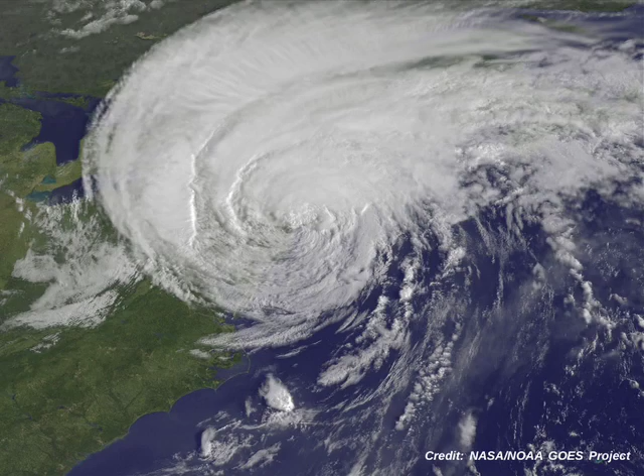Topic is preparing for the storm, lessons learned from Tropical Storm Irene on planning for resiliency and local infrastructure. There's that word resiliency that Tony Flint told us actually does resonate with the public, so we hope it resonates with you as well. I'm Heidi Ricci with Mass Audubon, Shaping the Future of Your Community program that provides support, technical assistance, and workshops to local citizens, trying to encourage them to work with all of you in local planning and land use regulation. And we have three speakers today.

Carrie Banks from the Division of Ecological Restoration, Bob Dean, who's with the Franklin County Regional Council of Governments, and also Selectman in the town of Buckland, which was heavily impacted by Irene, and Patrick Garner of Patrick Garner Associates, and he's also president of the Massachusetts Association of Conservation Commissions.

I'm Carrie Banks. I work with the Division of Ecological Restoration in the Department of Fish and Game. And I grew up along a river, and I've gotten to know it very intimately. And some of the slides that I have in here are of that river and of the area that I grew up in. And I wanted to talk today about some of the river's responses that we saw to Tropical Storm Irene. And probably many of you saw this image on the news, I think about a week before Irene hit. We knew it was tracking up the East Coast.

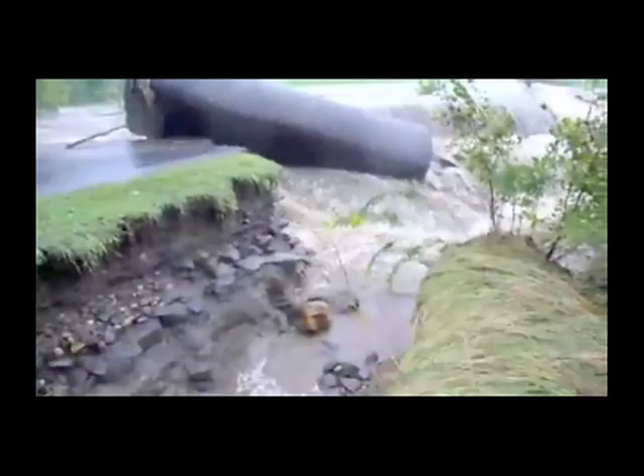As Bob had mentioned, you can probably see numerous videos online of all the flooding that was occurring. I particularly like this one because it speaks to a couple points that I want to make today. The rivers carry more than water. And unfortunately, sometimes that means it carries away our infrastructure, and will have consequences both at a public safety level, but also at a habitat level.

So, as I mentioned, I grew up along the river. My parents still live along the Deerfield River in Charlemont, Mass. And during the day Tropical Storm Irene was hitting here in the northeast, I was paying very close attention to the flow gauges on the Deerfield River. There's one located at the Fife Brook Dam in Florida, Mass. And then there's one about 12 miles downstream of there, located just downstream of the town of Charlemont. And my parents' property is right in the middle, between those two gauges.

But when I saw this number, I was a bit curious. You can see that it was about 53,900 CFS, a little less than the 1938 flood, which was the peak recorded flow there. Upstream at the dam, their emergency action plan that they submitted to FERC, where they were actually getting prepared for the potential for the dam to fail, they reported that their flow was 58,329 CFS, about 4,000, 5,000 CFS difference.

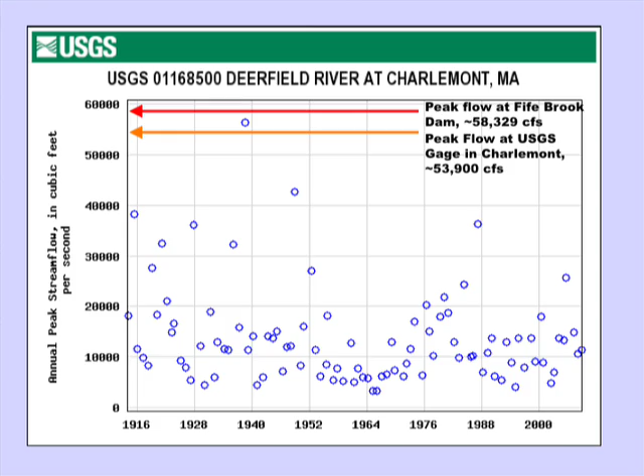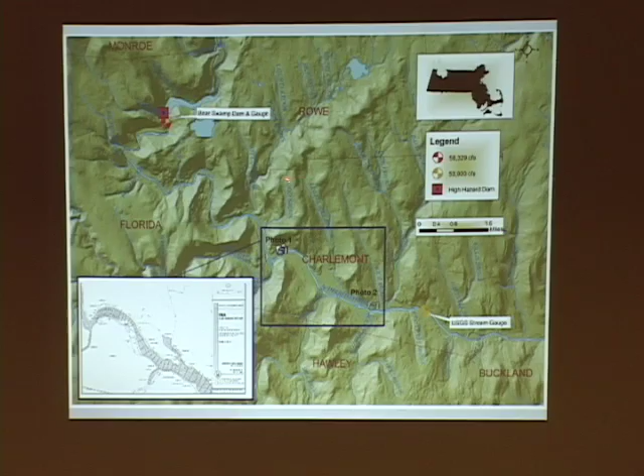What's interesting about that, as I mentioned, the dam is up here on the upstream end. You follow the Deerfield River down, you can see a lot of these tributaries coming in. Pelham Brook, the Cold River, where a lot of the damage along Route 2 occurred, and you come all the way downstream to the USGS gauge. So you can imagine that those ungauged tributaries are contributing a lot of water as well. So I sat there and I thought, where did all the water go? I mean, I know USGS probably has a little bit of fudge factor in their numbers, but considering all the flow coming from these tributaries, there must have been something going on.

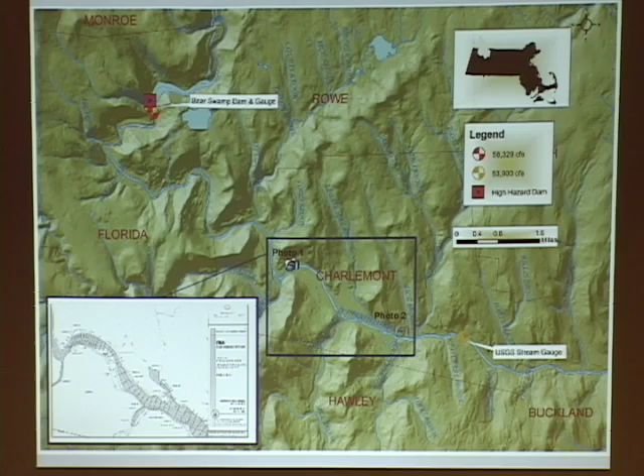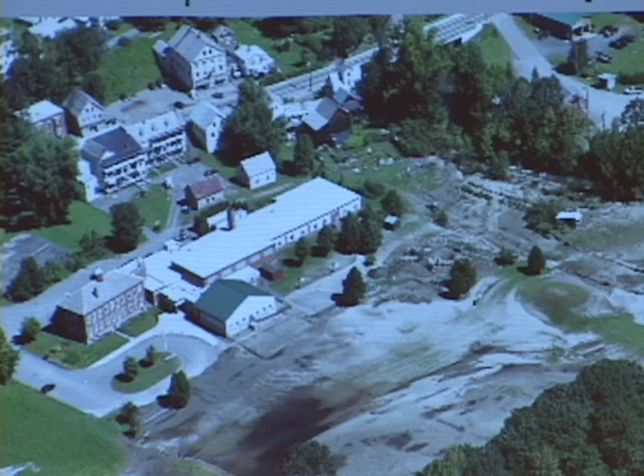Just downstream, this is overlooking the town. That's the Charlemont Elementary School. Back here in the background, you can see this is the wastewater treatment plant, the highway department, and emergency services, fire department. And you can see this whole area was inundated. You can see the deposition that occurred from the flood.

And I think that one of the points I took away from this is that floodplains are important, and as much as we can, we should be protecting them from development. And we should be trying to maintain that access to the floodplain. Pat had mentioned that in a lot of, especially urbanized areas, we see what we call degradation of our streams. So basically the stream is down-cutting the channel, and there's peak flows that you're getting from the runoff.

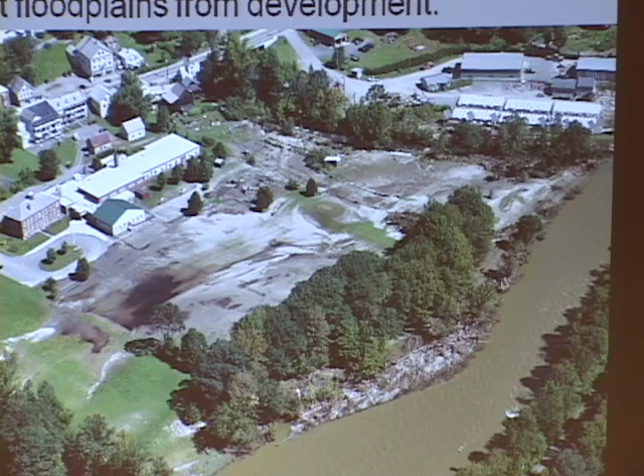And in some of these old farm areas, you often also find old berms that have been built up along the river, trying to prevent some of the higher flows from flooding out the crops. And these go way back. These go back to the '27 flood, '38. You'll often see them right along the river corridor, and that can also be another way of cutting off access to the floodplains.

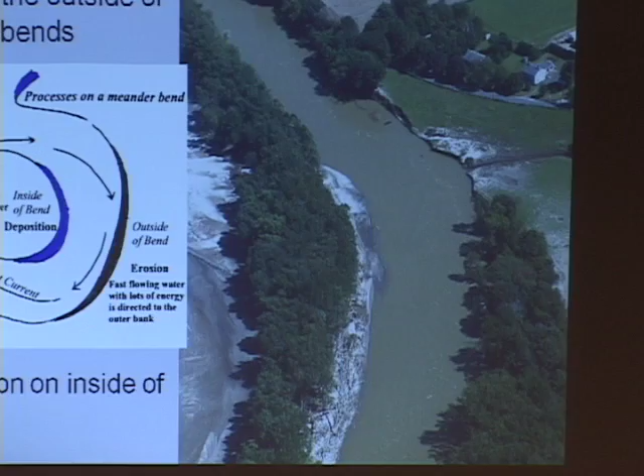Another thing to keep in mind, as I mentioned, rivers not only move water, but they're moving sediments, they're moving other debris that's in the stream. And it's a way for the river to lose its energy. Water has a lot of power. So if you think about it, as you're coming around the curve here, a lot of that energy is focused on the outside bend. So that's where we often see the erosion occurring. But it's losing energy. It's got roughness along this inside bend. And that's where we're often seeing the deposition occurring.

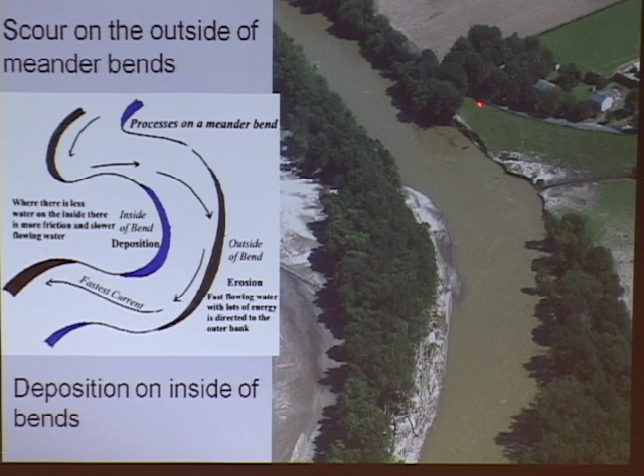And I think, as you're planning infrastructure again, taking a look at these areas. If we had the opportunity going back when this area was being developed for the farmland, they might have considered where you're putting the road here in relation to how close to the outside bend it is.

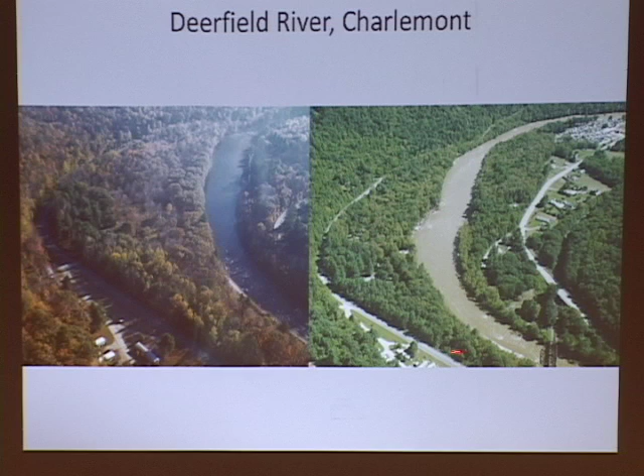Just going back to my parents' property for a bit, the photo on the left there was taken a few years ago, and the photo on the right was just a couple days after Irene. And what happened here was the channel actually realigned and adjusted and widened. And you can see again, my father got a very quick lesson in what we call fluvial geomorphology, studying how rivers change. Because he realized he lives on the outside bend. So he lost 3 to 4 acres of land during the flood.

Then you might notice this white patch. That was an example of an old berm. It was basically probably dredge materials that they pulled up from the river, basically to try to prevent the river from cutting into the area here and flooding the agricultural lands. I've seen photos from Mohawk Trail, which is right here, looking back this way, in the 1920s. So it was maybe put in during the Conservation Corps, maybe after the 1927 flood. But it's been there for quite a while.

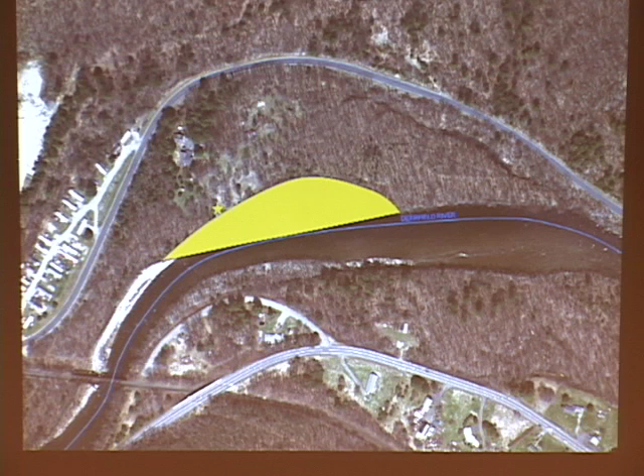What you'll notice is something that we often see in bank failures. Just downstream of where an area has been hardened or influenced in this manner is where the bank failure occurs. And this is approximately the area of the property that was eroded away during the flood. Again, this is just taking a look. This is where that cobble bar was. It's now been replaced with all these fine gravels and stuff. And the whole channel, again, shifted left and actually widened quite extensively.

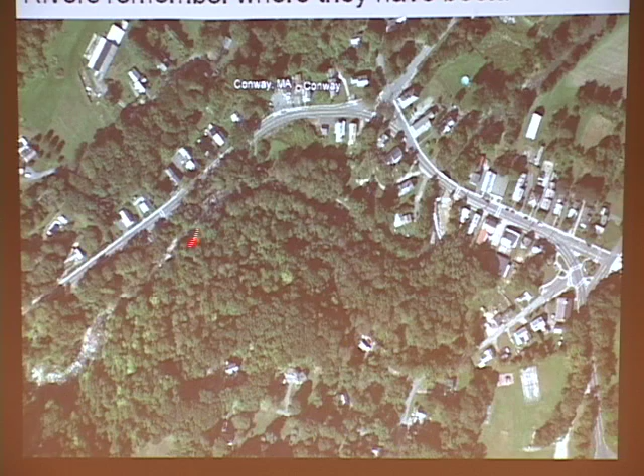Another thing I think you should keep in mind is that rivers remember where they've been. And this is probably a good example. This is in the town of Conway. The town has been struggling for years now. You can see the Route 116 bridge here. It goes over the South River and down here. And right along here you can see that there's something going on. And if you follow the river channel, it kind of looks like the river takes a really sharp left.

If you look even more closely, you can actually maybe find that old riverbed. It used to come somewhere into town here. I'm not quite sure where, but talking with a couple of historical folks up there, the river channel actually came through the center of town and headed down on the South River a little bit further down. But at some point they came in and they filled it in and tried to adjust the river left. If you walk up in the woods, you can actually see one of those examples of those high berms.

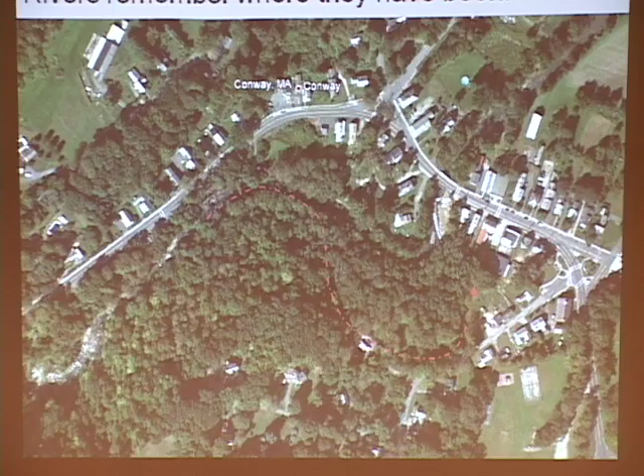This area has failed repetitively. Obviously, being just upstream of the Route 116 bridge is a concern. I was actually out there this past summer, just in July, where they just completed the most recent restoration of this brook. I think this is a geocell type of technique. I was actually out there with a fluvial geomorphologist who studies these things. And he wasn't involved in the design of this, but there's a couple things that we were concerned with.

One of them is that, again, thinking about where the river channel is coming from, you're basically having the river hit this wall. And it is pretty vertical here. A couple of the projects that I've been involved with, which have used similar bioengineering techniques, we actually try to step the bank back instead of having these straight vertical walls. But this is what the site looked like after our meeting. It lasted less than a couple of months. At this point, I think the town has just dumped rock.

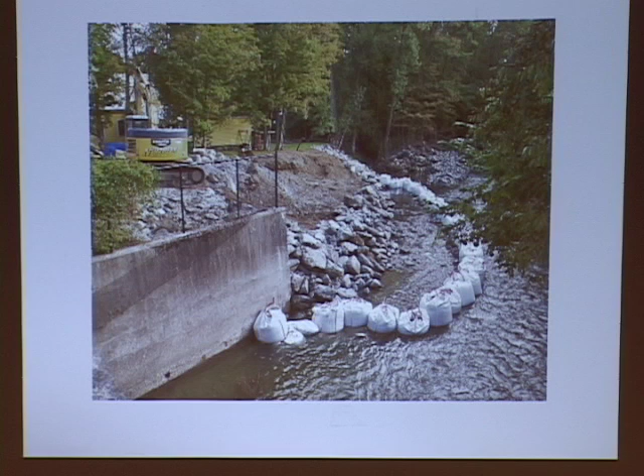The whole South River, or a good portion of the South River, is actually now under a fluvial geomorphic study, trying to look at areas where you can actually hopefully alleviate some of the pressure here. Maybe finding areas where you can regain that access back to the floodplains, or remove some of those old berms. It's actually something that they've been doing a lot in Vermont, protecting those floodplain corridors and finding these spots where you can actually have these relief valves so that it can protect downstream infrastructure.

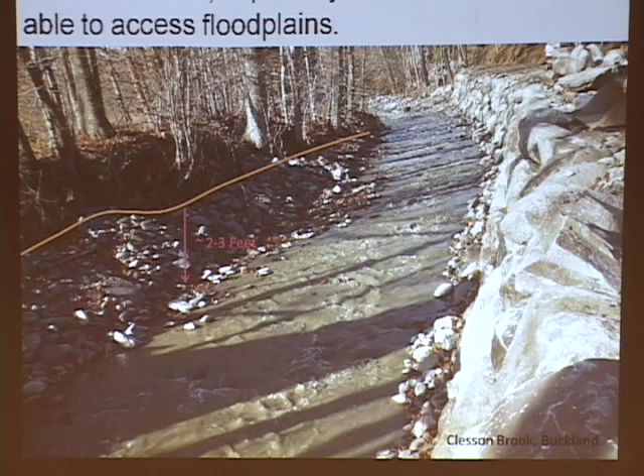Another area that we saw, this is up in, I believe, probably Buckland, or maybe just a little bit further up on Clesson Brook. As I mentioned, we saw some aggradation, some channel realignment, but we also saw some degradation. This is the river channel cutting down. And I think, as Bob had mentioned during his presentation, you have the road that follows pretty closely along the brook there. And again, if the river can't lose its energy by spreading out across the floodplain, it's going to pull the materials. It's taking the energy from down below and moving the materials down below. And often as it degrades, the structures that we've put in here to try to protect our roadways will often get undercut.

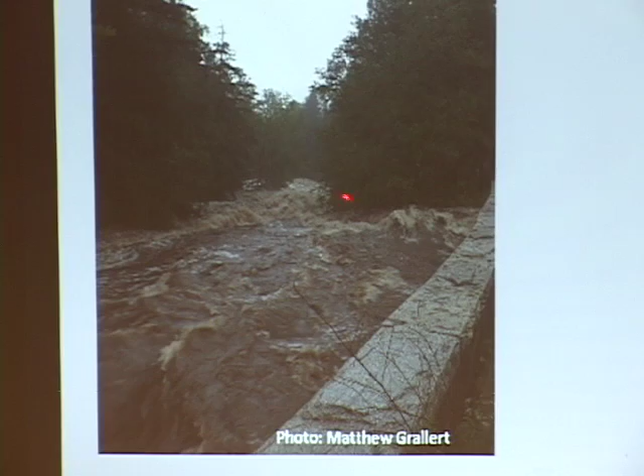Bank hardening has been something we've used for many years, and it's come in various forms. This is an example of a retaining wall up on the Swift River up in Cummington. This is during Tropical Storm Irene. It's kind of hard to make out, but right there on the corner is where these next set of photos were taken after the storm. This is obviously out on the outside bend, taking a lot of that erosional pressure.

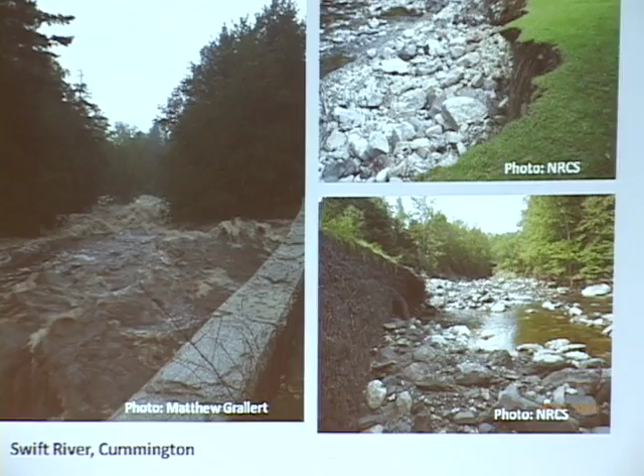And you can see that the NRCS had been in there, I think, in the 80s or 90s, and installed these gabion baskets. I don't know if everybody knows what a gabion basket is, but it's basically a wire mesh basket with rock fill. And again, they often have designed these to be stacked vertically. And what happened is, and I've seen this in other floods, the river gets up behind these baskets and just peels them off the bank, and they start slumping. You can see this bottom one's looking upstream. You can see that the gabions are starting to slump in.

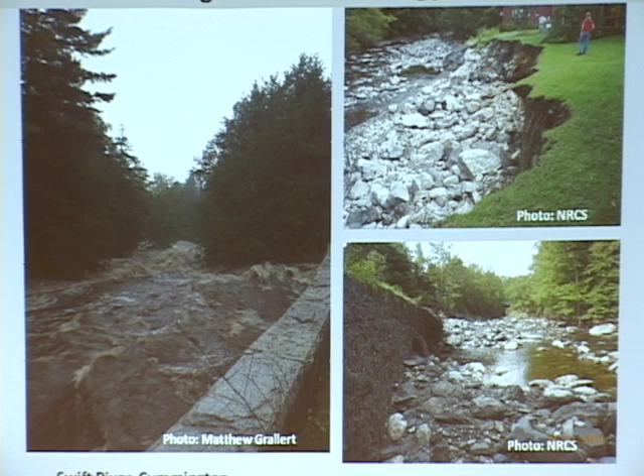So usually, if you keep hardening your banks, you're just pushing that pressure downstream. And if you keep hardening it, it's just transferring the problems downstream.

We also saw impacts at extreme pinch points. This is a good example here. This is the Deerfield River again, up at the Zoar Gap area. As you can see, you have the railroad on one side. You have the Zoar Road going off this way on the other side. And basically, again, there's no access here for floodplain access. And the river just scoured out the material, and it resulted in the road failure.

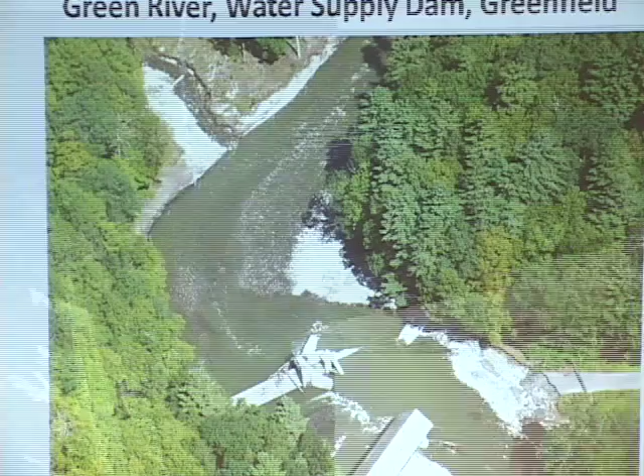Another example, I think some of you are familiar with, is this is the Green River Water Supply Dam on Green River in Greenfield. This is their covered bridge. And you can see what happens is if the river is confined or has an area where it can't adjust, it'll find a way around. And this is what happened. It failed on the river left embankment there.

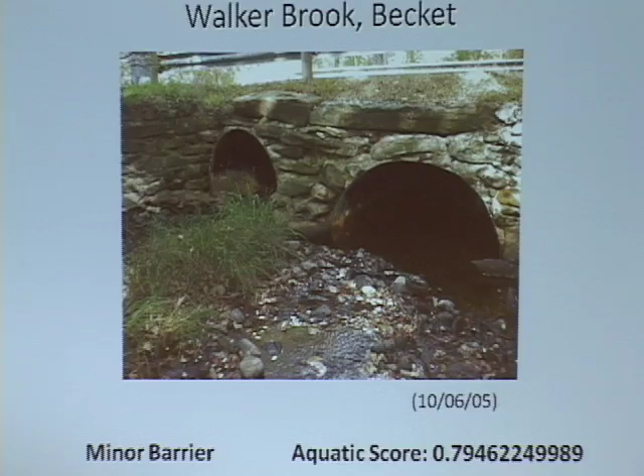So we've heard a lot of mentioning about undersized culverts, and one of the reasons I'm here today is to talk about some of the work that I've done with our volunteers here in Massachusetts, including Jane and some other folks out in Housatonic, where we've gone out and actually assessed crossings. And typically, our volunteers have been concerned about fish passage, so we're often looking for things that inhibit fish passage. What's interesting is a lot of things that indicate problems for fish passage are also indicating problems for culverts being undersized.

So for example, here, this is the upstream end of this culvert. And you can see that there's this deposition of material. Basically what's happening there is that at higher flows, the water's ponding up behind this culvert, it's losing its energy, and it's dropping out that material, which is also ultimately reducing the capacity of this culvert to pass the higher flows. So this was surveyed back in October 2005. Ironically, a week later it washed out. Of course, I don't have any photos of that washout.

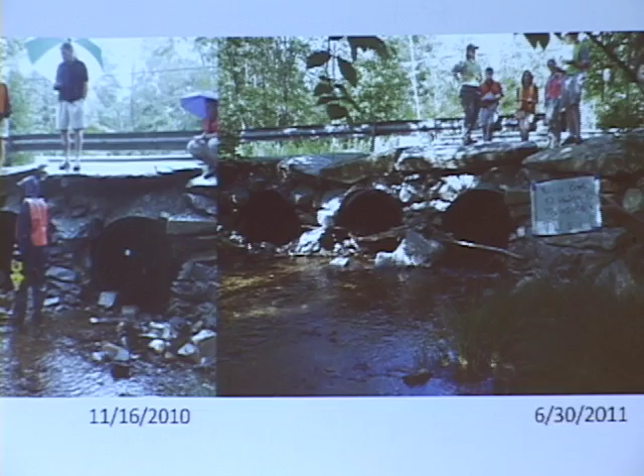But it got replaced with this here. And it's actually a place I've taken my volunteers back to do training on. It was replaced with 3 round plastic pipes you can see here. And we still found this to be a moderate barrier for fish passage, and for similar reasons. Another issue is that with the 3 culverts side by side, it's not allowing the river to pass not only the substrate that it's carrying, but also any woody habitat or other debris that it may be carrying, so it can easily get clogged up. Well, sure enough, during that rain, it got washed out again.

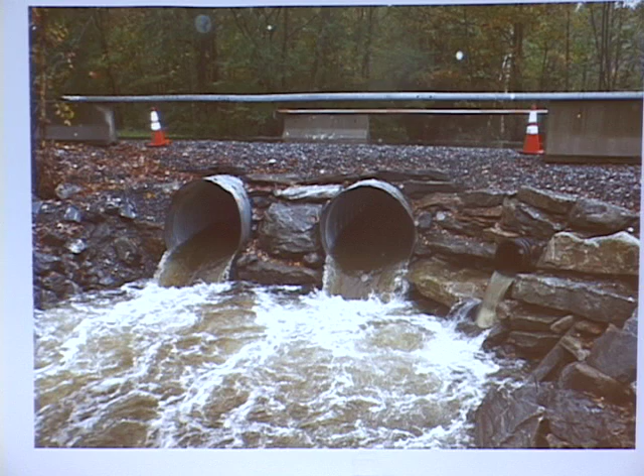And I think for a lot of the reasons that Bob described earlier about sort of not having the expertise within your community or the limitations of the funding sources, the next slide I'm about to show you is basically what we often see happen. And I want to get your sense on whether you think this is going to be a solution. So this was replaced with 2 5-foot metal corrugated culverts. I'll put money on this that this isn't going to last for very long. If the other ones had failed within a 6-year time frame, I think that these are highly likely to fail.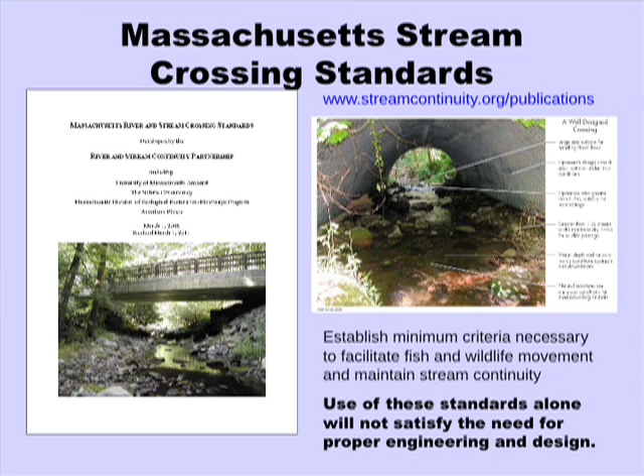So I also wanted to mention, as part of the work that we're doing, looking at fish passage, there's been a working group here in Massachusetts developing standards. And although the standards are primarily focused on facilitating fish and wildlife passage or crossings, as I mentioned, some of these things get addressed by allowing the movement of these materials through the crossing. But they can't be standalone. You do have to do some of the hydraulic and hydrologic calculations that Pat was mentioning to take a look at these things. But we do have some examples where when we followed these standards, these types of culverts have survived these storms better.

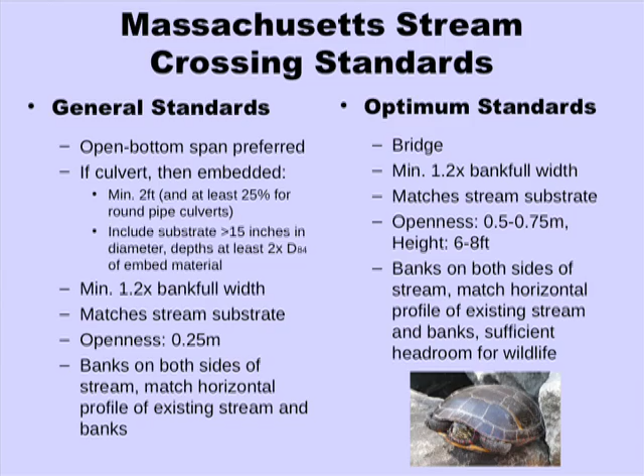And there's actually 2 sets. Basically, the general standards and then the optimum standards. Optimum standards are usually in areas where we have really critical ecological infrastructure. So it's basically a wildlife passage or fish passage for endangered species or species of special concern. But generally, the general standards are what we're targeting for. And they typically are, again, an open span, or if there's a culvert, it's embedded to provide some of the natural substrates within the crossing.

These or similar standards have been incorporated into some of the permits, including the U.S. Army Corps of Engineers Programmatic General Permit, the Massachusetts 401 Water Quality Certification, and further, the Wetlands Protection Act requires that the crossings maintain a carrying capacity of the channel.

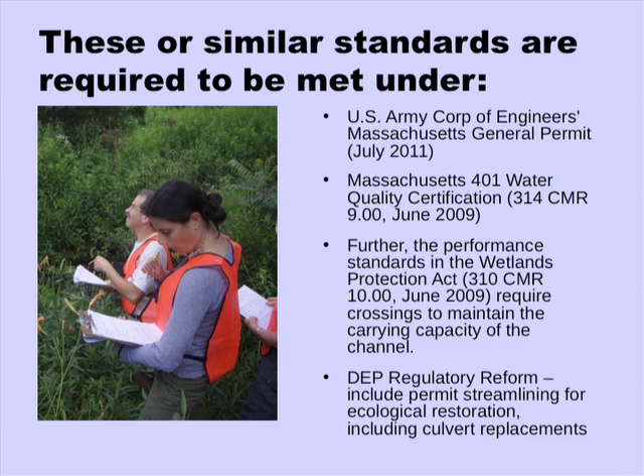There is some regulatory reform. I'm not sure how many of you are familiar with it, but DEP has been looking at some of the regulations and looking at streamlining some of the regulations. And one of the things that they're actually looking at is coming out with a general permit that would look at, if you met these types of standards, you'll be able to facilitate a much quicker permit process. Those aren't out yet, but they should be out for public comment probably in the next couple months. So keep your eyes out for those.

Again, this is an example I like because it shows the overlap of public health and safety as well as sort of our ecological infrastructure. This is on Bronson Brook in Worthington, Mass. It's a double box culvert. And if you look up through the culvert here, you can actually see what I've been talking about with the movement of the woody debris and material. This got clogged up and overtopped on a couple occasions.

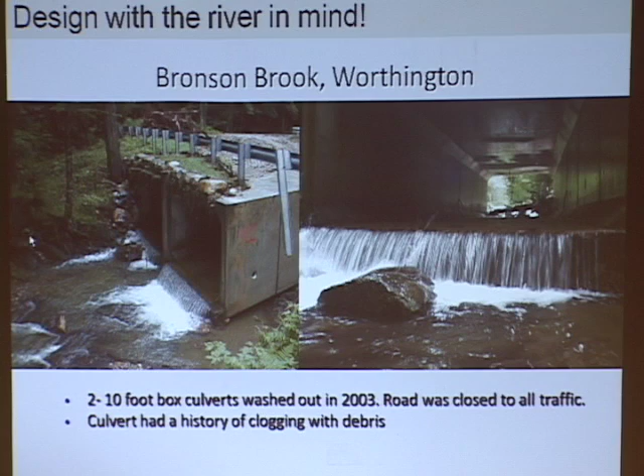And after the storm in 2003, the town had enough. And it happened to be one of the great cold water habitats for brook trout and Atlantic salmon. So my division, as well as several other conservation groups in this region, got together with the town and provided funding to replace this crossing.

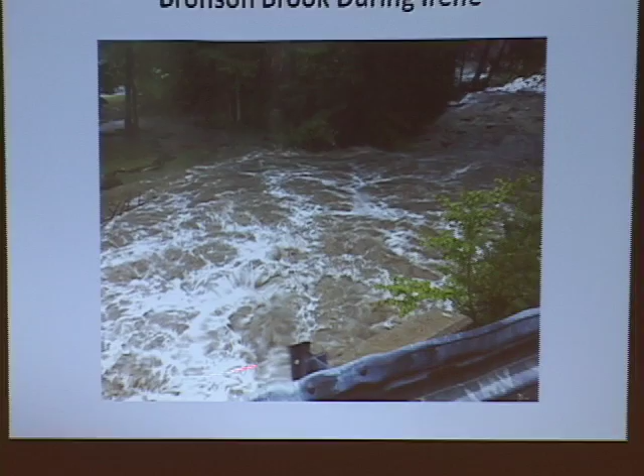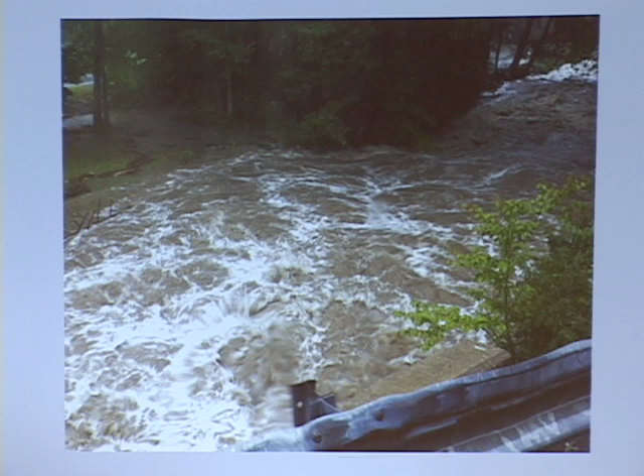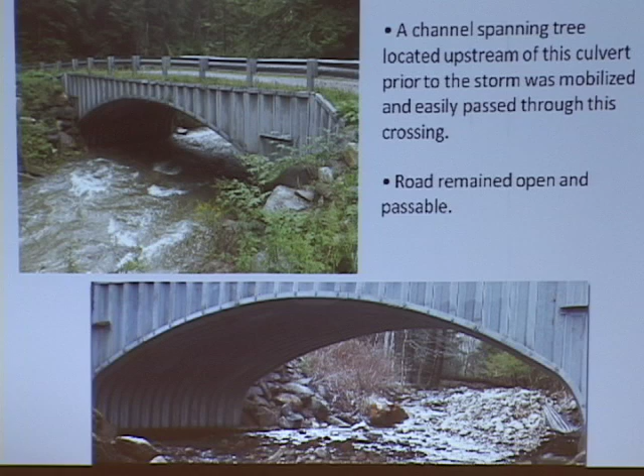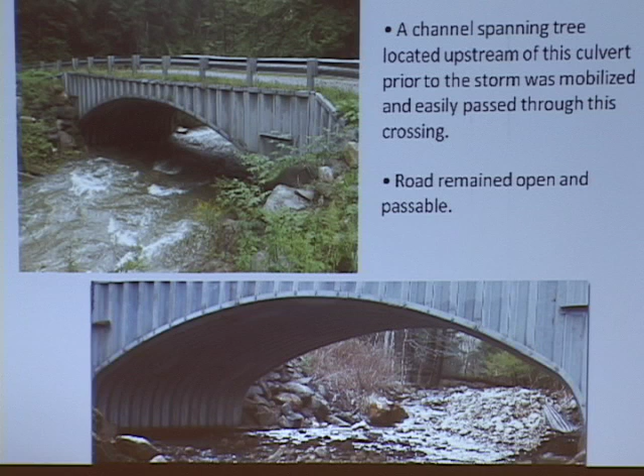You can actually see this is just after we had replaced the culvert. A tree had naturally fallen, a channel spanning tree. This tree was gone. I was amazed when I got up there, and I'm looking for this huge tree. The water was capable enough to carry this tree and easily pass it through the culvert. So again, when you think about some of the things that are going on from a river perspective, and you keep that in your mind as you're proceeding with design and planning, I think that it really helps you find ways to work with the river, both from a public health and safety perspective, but also from protecting some of the ecological benefits.

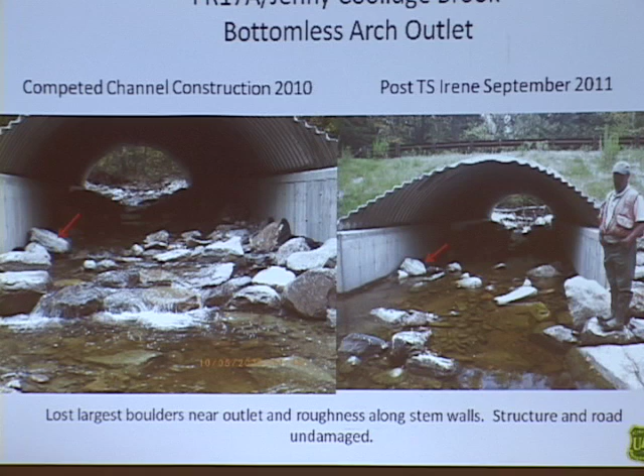And we're not the only ones that are seeing this. The Forest Service up in Vermont had similar culverts. I'm not going to talk too much about these, but they're basically having similar findings. And they're actually going through now and doing assessments both on the culverts that survived, that met a lot of these standards, and some of the traditional culverts that failed. And they're looking at both the economic impacts to the communities, so the ones that remained open versus the ones that failed, as well as some of the adjustments to engineering calculations and things. Again, this is just another example.

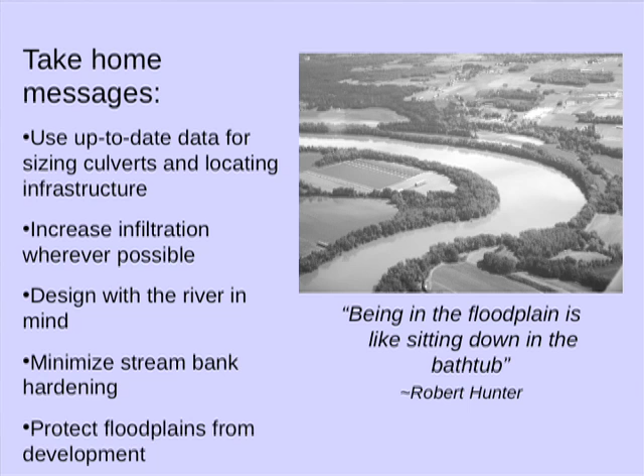Just some take-home messages. As Pat was mentioning, using up-to-date data for sizing culverts and locating your infrastructure, I think, is really important. Wherever you can, increase the infiltration, using some of those BMPs and stormwater techniques. And keep in mind the river when you're going to design. Minimize the stream bank hardening, and where you can, protect the floodplain from development.

I also just wanted to mention, I was just at the Fish Passage Conference happening up at UMass, and I grabbed a couple of documents that they put together from the U.S. Fish and Wildlife Service. They actually deployed teams up in Vermont which provided engineering expertise to communities. It's something that they're hoping to provide in the future. And they also have a lot of great programs that we've worked with to actually work on some of these culvert replacements. So if you're interested, feel free to grab a couple of these as well.

I also have a poster that we're actually in the process of updating, but I brought a few copies today that talks about the standards and gives you some examples of some of the problems that we often see at the culverts, if you're interested.